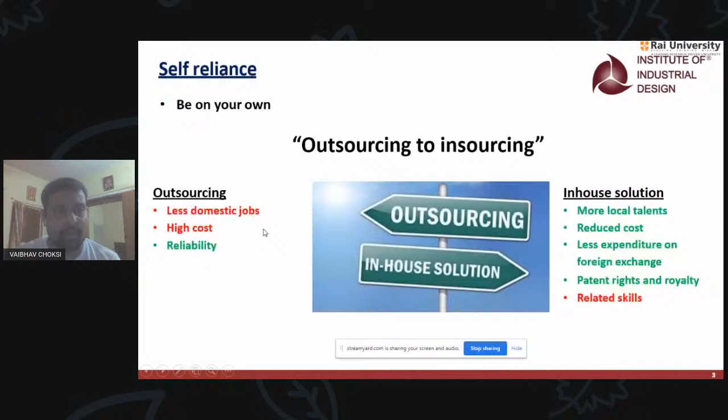Second thing we are seeing is that China is having almost 1 crore new patents registered, 1 crore plus. That means they are much more better than us in terms of new invention and innovation. Second rank is of the US, having more than 90 lakh plus patents registered in different fields. So this is how they are quite more self-reliant. If the innovation and invention cycle is promoted, we can become self-reliant in our own production and own things.

Second thing we have learned is to conserve. As engineering people, first thing we should learn as Indian engineers is that whatever is waste, we should be able to turn it into the best. Are you getting my point?

So whatever things are available, as we are learning in our college projects, we are assembling things which are quite cheaper compared to other things to make our projects. This is called jugaad technology, meaning whatever resources are available, we connect and assemble them to make good projects. So we are reducing waste on one side and making something new from those things. The benefit is we have to import fewer things into our country, we will have a clean environment, and we can save money.

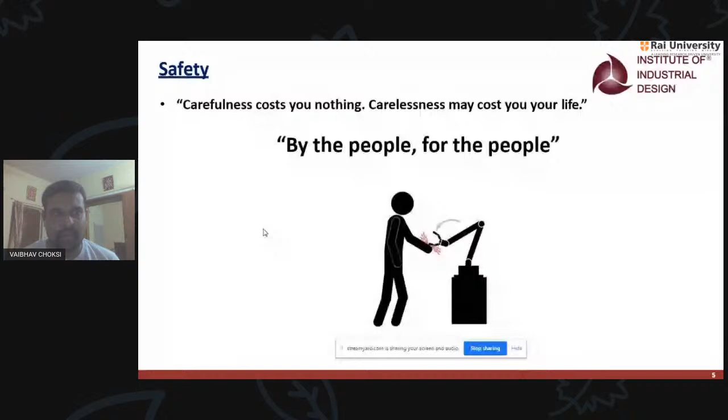Second thing is safety, which is one of the most important things nowadays. As you know, health and hygiene, considering social distancing and all the parameters the government has given as guidelines, means we have to learn living with corona itself for the next 1.5 or 2 years. So safety is of prime importance for us, considering the whole situation and what we have to learn in the coming time.

If we are saying we have to become self-reliant, we have to become vocal for local, or local to global, all the concepts our honorable prime minister is providing to us. But on the contrary, we are not planning or focused on collaboration, we are focusing on competition. Still in India, the culture of collaboration is not as strong compared to the rest of the developed countries.

So now the era coming in the future will be of collaboration, not competition. For example, if some American company is providing good service in some IT sector, we are not supposed to compete with them. Facebook has developed such a good app for social networking. Twitter has developed such good apps for short messages and short content display. So what we are supposed to do is not compete with them.

We would need their 13 years of experience, and to bring that forward on our own would take us 14 or 15 more years of hard work. It's better that we collaborate with them and move ahead, rendering the best of the service, adding Indian service along with that foreign service provider, so we can move forward.

Same as what the Jio did, signing the MOU with Facebook. Recently, Mukesh Ambani, our honorable businessman of India, signed an MOU with a business tycoon from the Gulf countries, and that collaboration is moving forward.

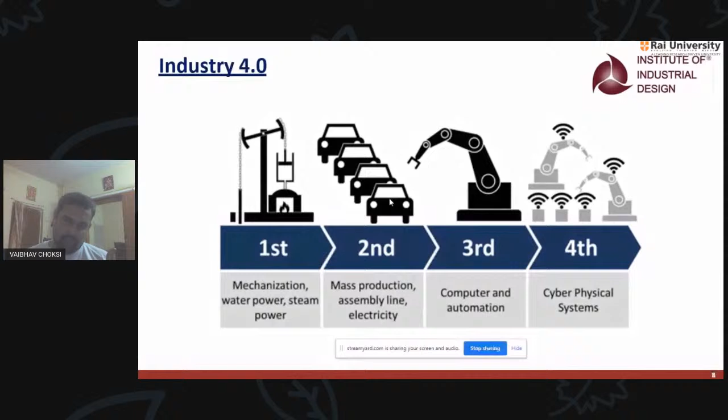Whatever things you are seeing in your daily life, for example, you are controlling your electric appliances from your mobile. That means you can turn on and off your AC, your fan, your washing machine, your refrigerator, every electrical appliance present in your home with the help of a small IoT application in your mobile.

You can control your water pump moving on the farm in the agriculture industry, the water pump on your farm, even if it is far, kilometers away from that location, that is, X number of kilometers away from your home or your location.

You can control the on and off of your water pump from your mobile itself, even at midnight. There is no need to go to the farm at 3 a.m. or in the midnight just for switching off the pump, for cultivation of the crop and all that.

The third thing you've seen is drone technology being used. You are controlling the whole drone for security purposes, for spreading pesticides in the agriculture fields, all with the help of your mobile. So this is the cyber physical system.

I will show you in the coming time that RPA, robotic process automation, also uses IoT and these things. So in the coming days, IoT, cloud computing, artificial intelligence, all these things will be the regular habit of people, especially mechanical engineers.

If you are planning to have a good career, then you should be familiar with these terms and you should have good skill in these forms.

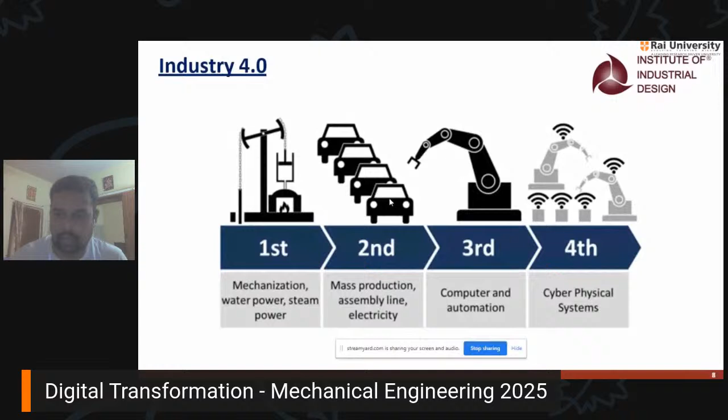Now the thing I want to show you is product design and development. I'm going to give you 5 to 10 good fields in mechanical engineering that will be the trend of the future, and you should learn these particular skills in the coming days if you want to have a good career in this field.

This concept you've heard is not new. What I'm discussing is not a new term - product design and development is a very old term. But now in this digital era, this design and development process is going to become digital in the coming days.

First concept is product sketching, second is prototyping, product styling, and reverse engineering. These four are titles you have heard over the last 3 to 4 years, so much that you might have attended a lot of seminars on these things.

Today what I'm going to show you - this is all about sketching. What is product sketching? I would like to stop sharing my screen, especially from this point of view.

Yeah, and now... One second, now I'm coming back. Yeah. Okay. Yeah, so now it is okay. Now I think you people can see my screen clearly, right?

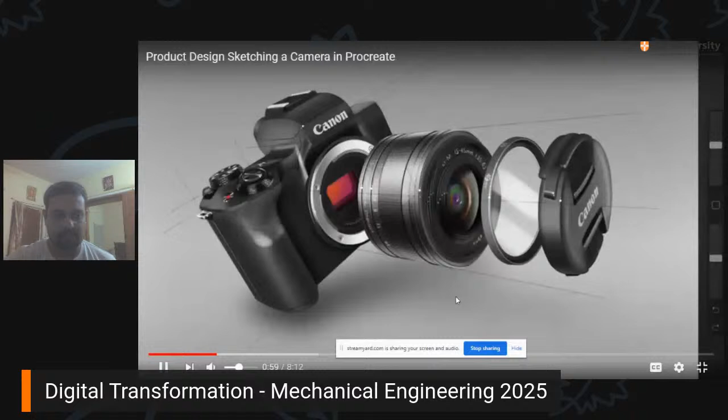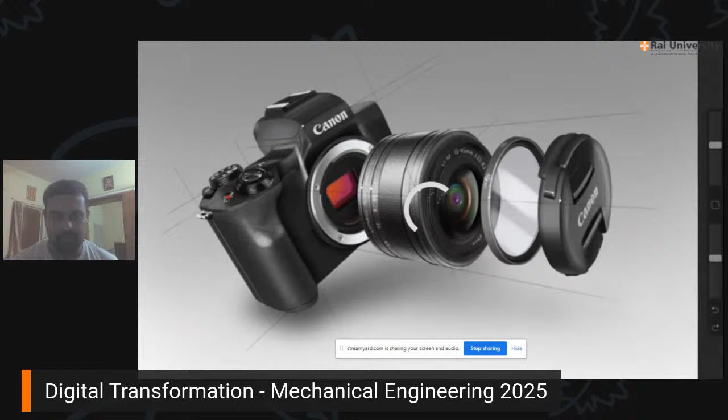The first thing I want to point out is that because this was a commission piece, it's always really important to work smarter, not harder, when you're doing a commission piece. So I did this photo shoot and actually set up this scene so I could use it as reference material for the post itself. Now if some of you think it's terrible that I'm using an underlay or tracing over something, that's the whole point of working smart, working efficiently, and getting everything done as fast as you can.

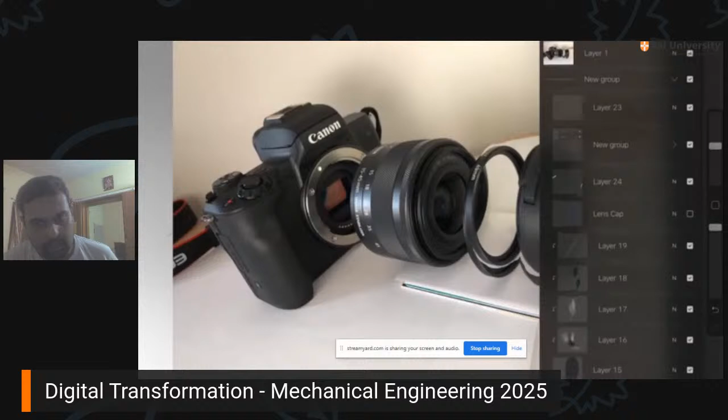I was commissioned to test out the quick shape feature, and that's exactly what I did. I wasn't commissioned to sketch something from scratch or come up with an image without any reference material. In the real world, outside of university and outside of learning about these things, reference material is used way more than you might think. So with that out of the way, I can turn this reference material off and go back to the sketch. I think what we're going to do now is come into the time-lapse replay that Procreate has installed.

Already I've gone in and sketched the outlines using the quick line and quick shape feature, just snapped the ellipses to where they needed to be. I've got this blue outline already.

This first part of the sketch is really quick because as soon as you put down some color, you can start to add in highlights and shadows using darker and lighter values. You can see here I've used a medium gray, and the reason is because that gives me space in the color spectrum to then add some shadows in with darker colors as well.

So you can see me going in here adding some darker colors. I keep bringing in the reference material at this very early stage to make sure I'm getting the lighting correct. And at this point, now that I've got the outline sketched, it's all about painting by numbers.

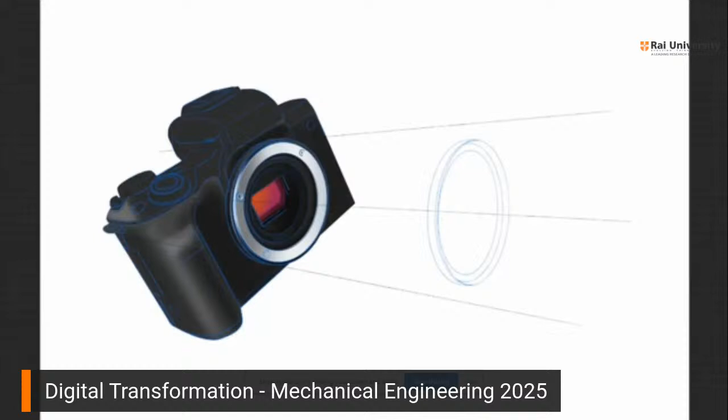So I can just go through. Apologies for the siren, living in London, it's really loud.

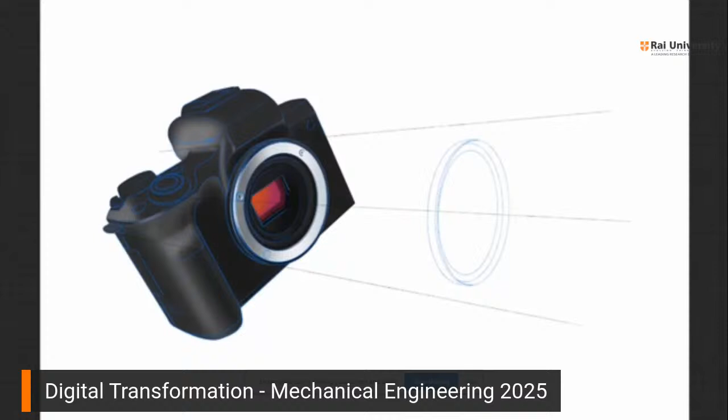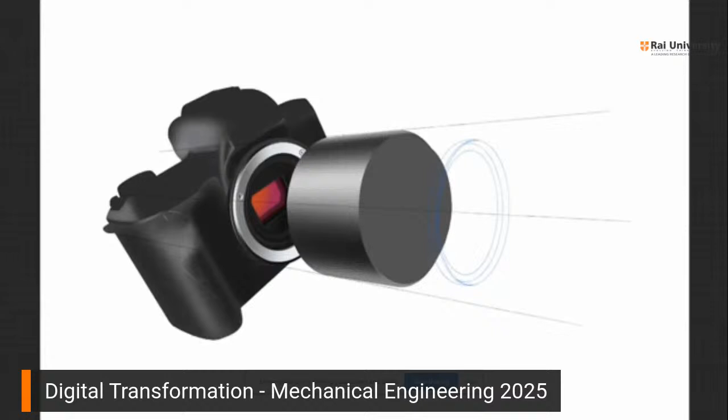As soon as I've got the base color, I can start adding in highlights and shadows. You can see I've done my leather finish, which I really enjoy using, which is just scribbling absolutely everywhere. If you do it enough and then pull back the opacity, you can really start to get a leather texture in there as well.

What I want to highlight here as well in the lens is how simple it is. If I bring it back up, it's so simple to shade in a lens with just four different aspects of it. At the very top, I've got a very faint amount of highlight, then some of the base color, followed by the main highlight which is the biggest white area, followed by the main shadow, and then some bounce back light at the bottom.

If you imagine this as a gradient, it's actually quite a simple gradient, but it gives such depth to the piece, and really makes it look cylindrical. With those bounce back features, it makes it look a little bit shiny as well, like a satin finish, and like it's in a studio, which is really cool as well.

I'm just going to let the animation play through a little bit now, and we'll see what I was up to. So I've started adding in the buttons now, and again, everything's already in, and I can start to add in the highlights and shadows based on the base color I already had on there.

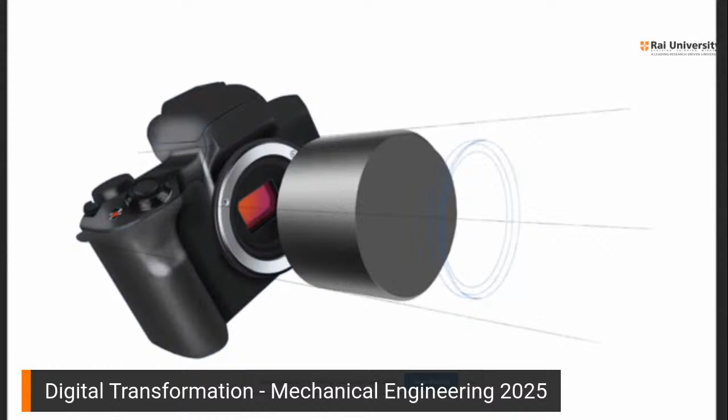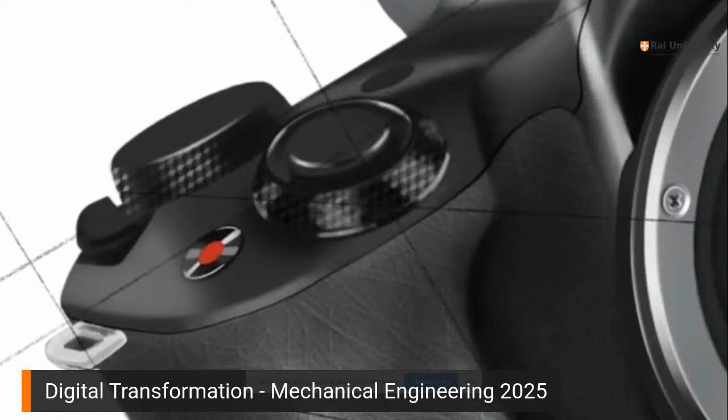This feature was really cool. I really liked having this texture from Procreate that I could use for this knurling feature on the buttons. It's a really nice texture in real life, and I really wanted to capture that in the sketch as well.

And you can see now, I think I might have just sketched these in, the lens cap and the ND filter that I've got installed on it as well.

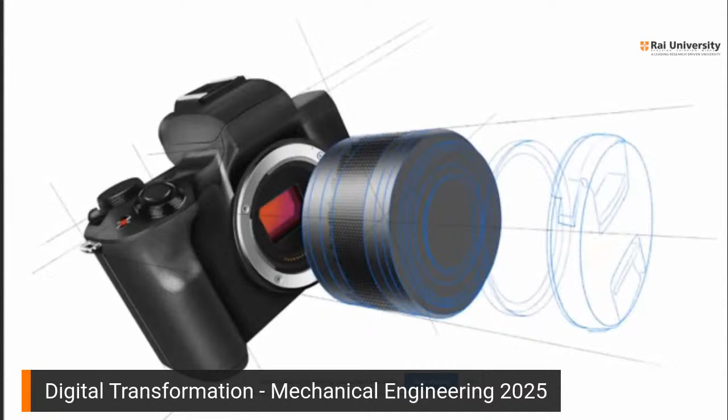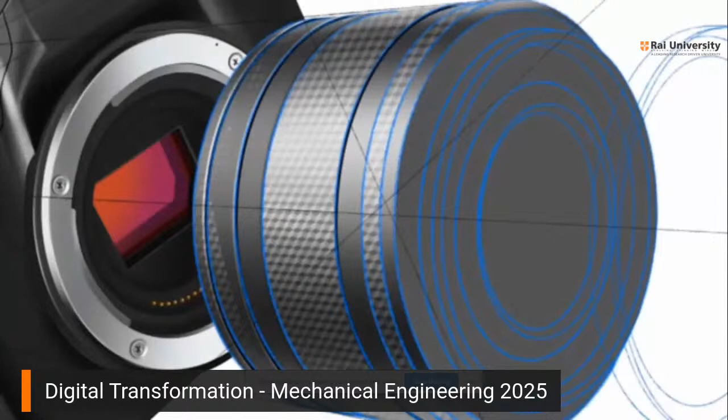Then again, it's just adding in those extra details, bringing back this knurling feature as well, and you can see me really roughly - this is before I was even figuring out about the clipping mask and layer mask features, so I was just sketching a huge area and then erasing it back.

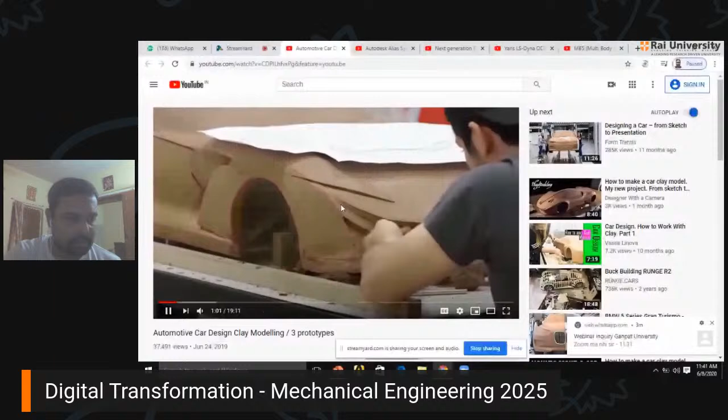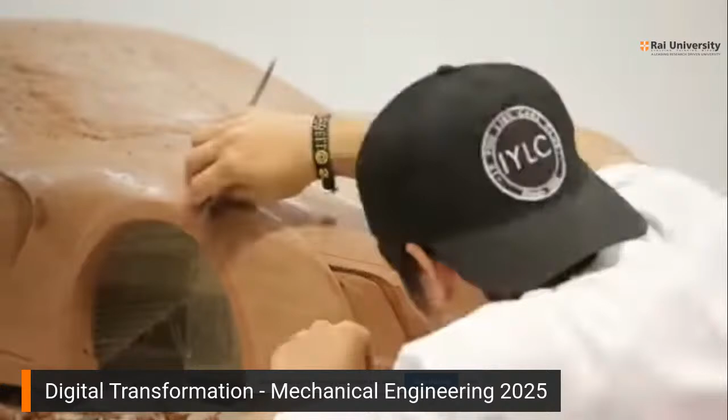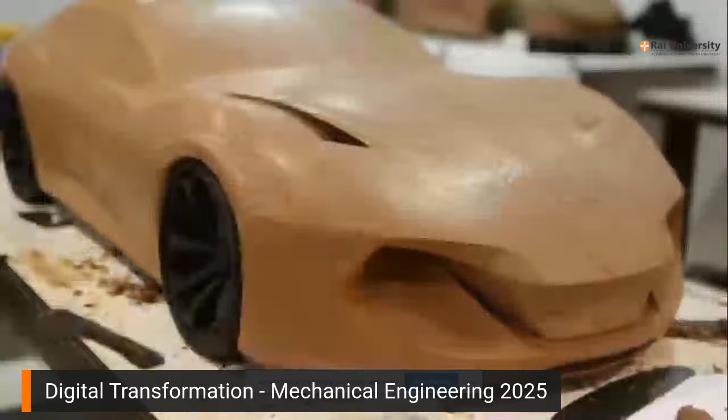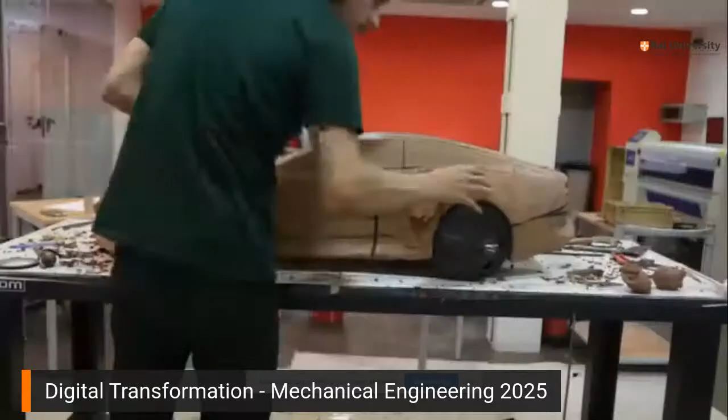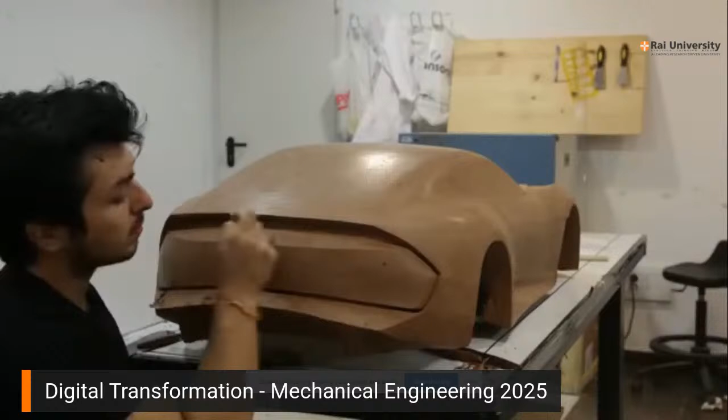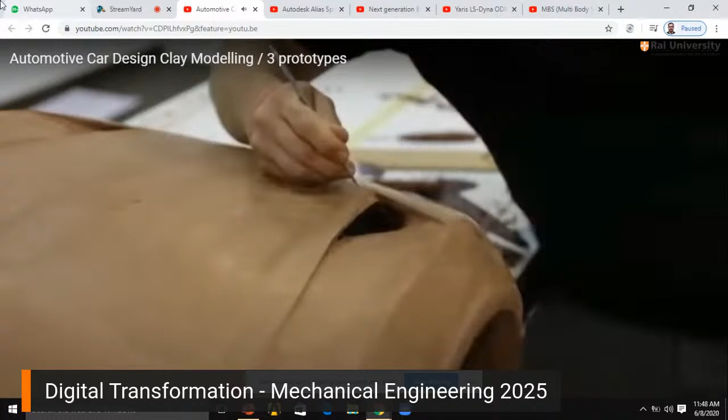So this was all about the clay modeling we were discussing. If you are a mechanical engineer and have not been exposed to this clay modeling technique, note that in future this will be part of your course. In the next one or two years, this will be a mandatory course for mechanical engineering students.

In future, every company, whether manufacturing a nail or a truck, will start using this clay modeling technique for prototype development and related work. After developing this clay prototype, it is very easy to manipulate that model with the help of reverse engineering software, and they make the actual model with actual 1:1 scale and actual dimensions.

Already the developed countries, those focusing heavily on R&D, are using this clay modeling technique. It is a very efficient and effective technique at the design stage to study different aspects. So what I want to convey is this is a coming trend.

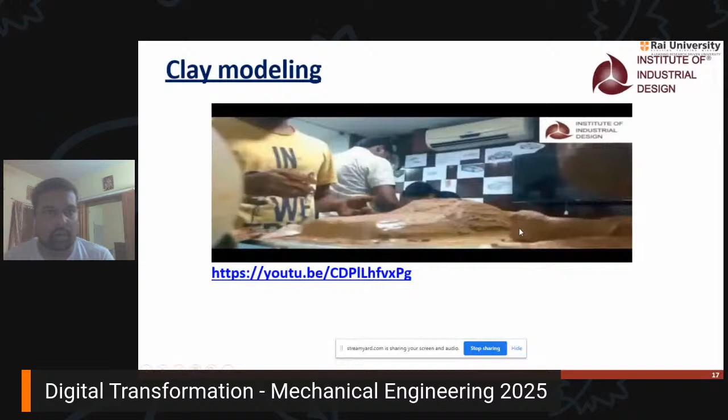So we would like to focus on tools for clay modeling. You can use industrial clay, armature material, carving tools, concept sketches, and all these things. What we already saw in the video was very informative.

With the help of clay, you can design your existing model. You can have the clay model, and after that, with the help of that clay model, you can scan it and manipulate it as per your requirement.

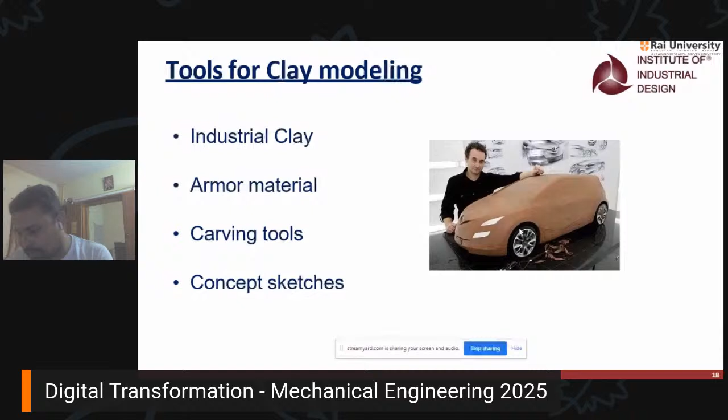Second thing related to this concept is product styling. Styling is also one of the most important things for you. See, previously, 15 or 20 years ago, you were not able to see the car shapes which exist right now.

You were also not able to see the car shapes which exist now, and every day you see some new company that...

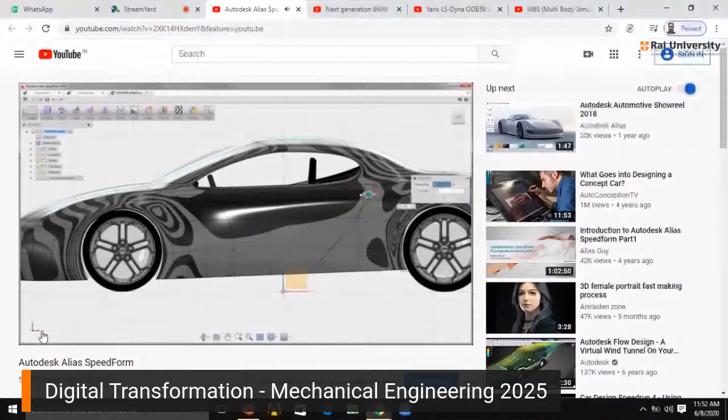The shape is your design and under your control. Experiment with the shape until it's yours. Add details to add character to your model with built-in tools. We can then add the details of the airflow design.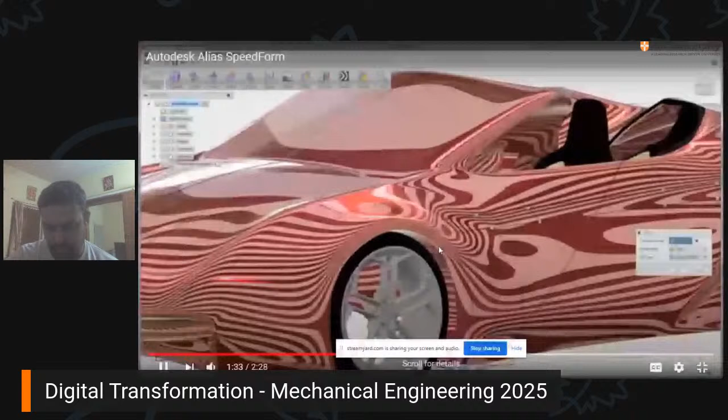But we haven't forgotten that the end result is the handoff to Alias for creation of the production surfaces. One way to show you this is the ability to use the theoretical curve to control the curvature, as we can see here. Trimming and detailing your model helps to clarify different parts of your design. Using easy-to-create cutting surfaces, we can detail out our model easily. Use in-core built-in ray tracing to look at your surfaces in realistic lighting.

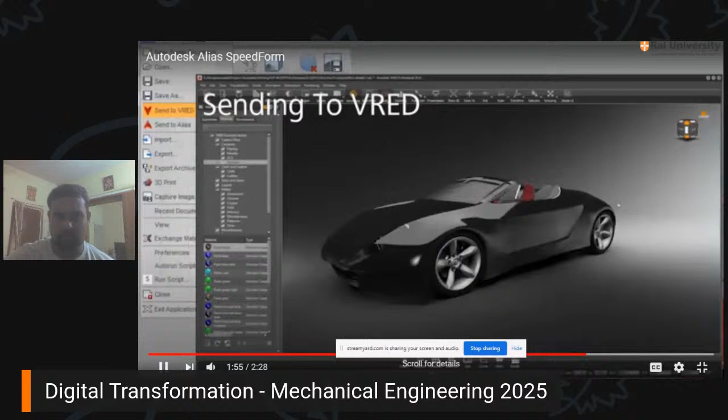Send your model to VRED, giving you the best-in-class visualization even during the conceptual design process. And as part of the Alias family, use Send to Alias to begin the detailed design or to create an early clay model of your design. Fun, fast, concept modeling built for creatives everywhere. Now that's design.

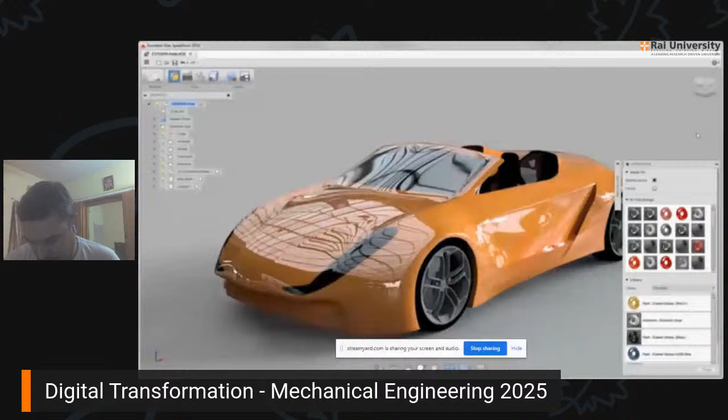So this was all about what we are learning, which is car styling within the software known as Autodesk Alias. You've seen the whole video of how essential and useful that car styling part is.

After modeling, you can use Autodesk Alias by first importing data. You have to go with reverse engineering software like CATIA and many other software available. After that, you can import that particular model into product styling software like Autodesk Alias and get good shapes.

Who should learn this? Engineering students of any discipline, working professionals in any domain, job seeking professionals, creative thinking people from arts and science background can learn. Product designers, industrial designers, creative R&D people.

What we are training is styling fundamentals. We are training computer design styling using Alias, 3D rendering of the model, surface analysis, and all these things. We do this with different companies and train them using the same methods.

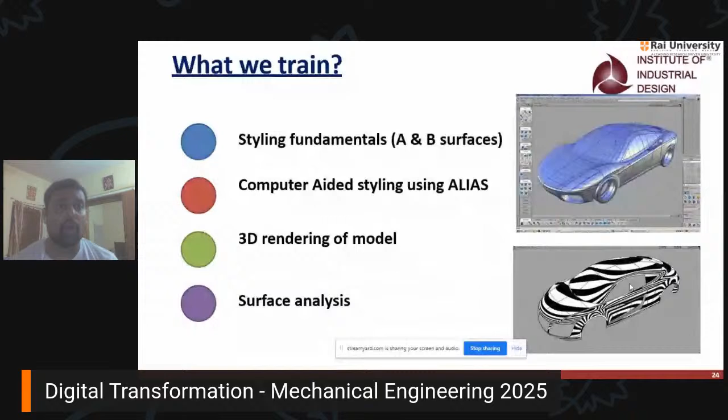What skill will you gain after completion of the 40 hour product styling technique duration? Creating class A surfaces using surface analysis, corrections, and 3D models. We have a 40 hour online course for these things as well, so you can get an idea about it.

Apart from that, we also have a technique known as reverse engineering. It's a fairly familiar thing, but after modeling that particular clay model of the car in your workshop, you have a camera available. You can see two cameras in the photograph, and with that camera you scan the whole car model. After scanning, that particular scan point data is imported into 3D modeling software, from which you can manipulate what I've shown you.

After seeing all these things, you can have these 3D scanners. This camera scanner you're seeing is worth 50 lakh. It starts from 15 to 20 lakh, and its range goes up to 1 crore or 50 lakh. With this camera, you scan the whole prototype made of the clay model, and after that you import it into software like CATIA and use it for 3D printing of actual prototypes. It's a superb technique and facility, this reverse engineering.

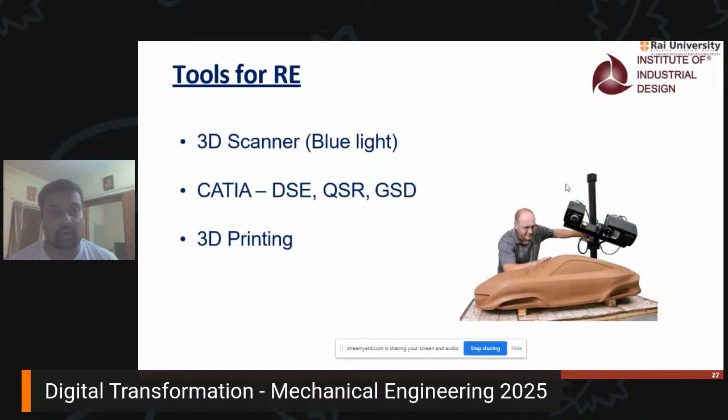What skills can you learn? Creating CAD geometries of existing products, improvising the design, importing the cloud data, converting the cloud data to a solid and surface, and refining that particular model. These are the skills you need to learn for executing this technique as a mechanical engineer.

Now, new things we are having are courses for new design and development. We also have a field known as ergonomics, safety, electrical vehicles, and power electronics. These four are also new trending things. As you know, ergonomics is about how comfortable you are feeling while handling that particular product.

Say, for example, you are using the i10 car and you travel for 10 hours or 750 kilometers, and you will feel fatigue. But the same distance you travel in a Toyota, BMW, or Mercedes, you will not feel as much fatigue as you would in a cheap car like the Hyundai.

So why is it that you don't feel fatigue when traveling in a BMW, Mercedes, Toyota, Fortuner, but you do feel fatigue in a Hyundai i10, i20 for long distances? It's because the advanced car is set up with a new ergonomic design. This is basically what it deals with.

Now, tools for ergonomics - what you want is CATIA ergonomics. Are you getting my point? It is for CATIA ergonomics and all that.

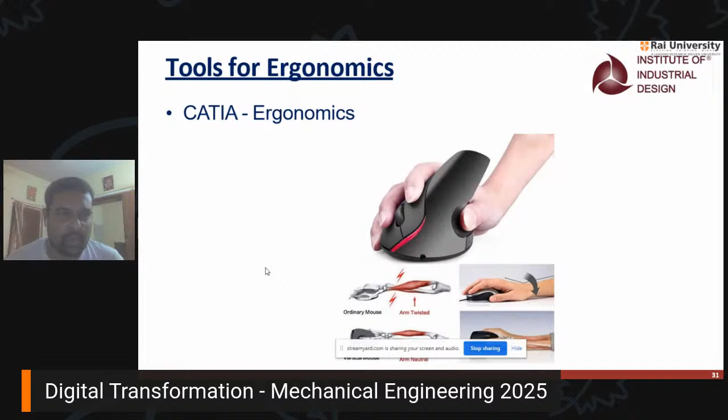I'm not talking too much about safety - it's almost a topic you can research, and you can find a lot more about it on the internet. Nowadays, another technology that is too much in trend is electrical vehicle technology.

I already mentioned in the previous webinar with Rai University on the 4th of June that in the nearby area of Ahmedabad, within 40 kilometers, electrical vehicle technology is going to make the Ahmedabad district a hub of electrical vehicle technology in the future, because Tata Nano's plant is also going to be modified to produce electrical vehicles in the coming 2 years. The Halol region is almost 70 to 80 kilometers away from Ahmedabad district.

That means MG Hector - MG Hector company is basically from China. It has taken over the company from General Motor, the Indian-based company. What they are starting is producing electrical vehicles in the General Motor facilities at Halol. That's how it's going to be in the future.

One second, I'm having some foreign call, I have to answer. Hello.

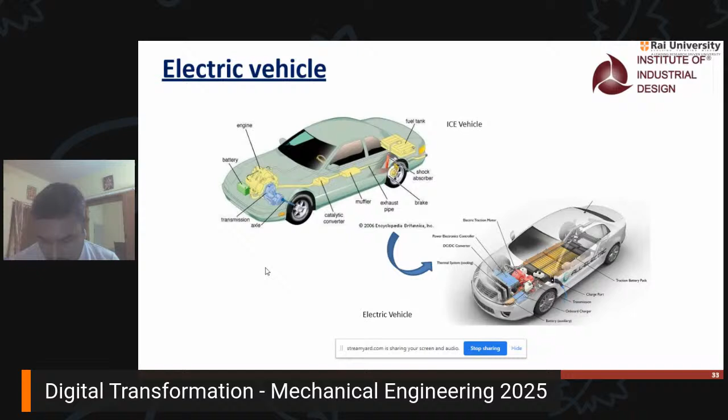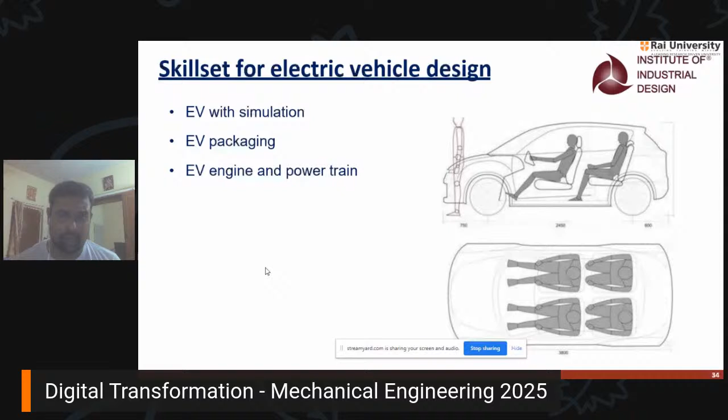That's electrical vehicle technology. In future this EV technology is also going to create a great boom in the field, and mechanical engineers who have the skill set to design EV with simulation, EV packaging, EV engine and powertrains - all these are part of mechanical work. So you should get trained and skilled to be compatible with this new technology and have hands-on practice on the same. In future, after 1 or 2 years, when Gujarat becomes a hub of EV, you can have your career as an entrepreneur, or get employed in a good company manufacturing EVs. So this is also a very good scope for mechanical people.

See, nowadays mechanical engineering is not wholly known for mechanical only. Now it has become mechatronics. For example, you switch on to RPA, that is robotic process automation. You switch on to AI. That means the mechanical engineer should also have knowledge of IT, that is information technology. Mechanical engineers should also have knowledge of C, that is programming technology, for programming the machine - machine learning, deep learning. These are the new concepts which are going to come.

So along with this, power electronics, IT and IoT are also becoming the core interest for mechanical engineers to have good employment and better career opportunities in the coming years.

See, these are also going to become a good future - that is BIW, simulation, quality and manufacturing. You heard this term for the first time, that is BIW. Now I would like to explore you with this BIW simulation, quality and manufacturing. Apart from this, BIW is very interesting. See, BIW is body in white.

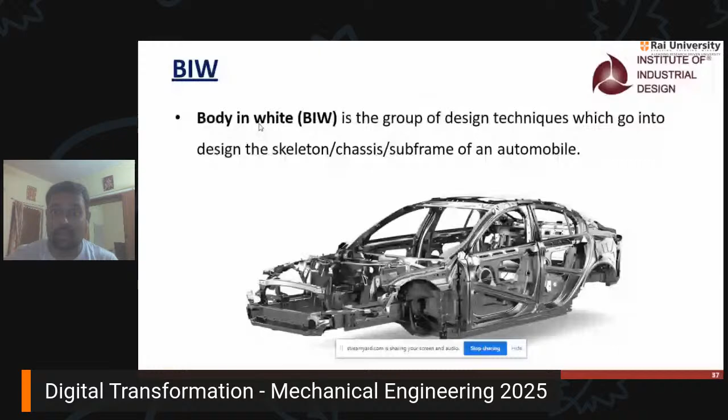What I've shown to you - whether it is an EV electrical vehicle or whether it is a petrol or diesel vehicle - when you are having a car, when you are having a car company in your region, in your Indian market, and if you want to make your own car, then the first thing is that you should know the BIW concept, this body in white concept. See, BIW is a group of design techniques which go into the design of the skeleton, the chassis, the subframe of an automobile.

See, up to this time, what our Indian car manufacturing companies were doing is dealing with this BIW design by importing it - that means outsourcing this BIW design. Indian companies like Maruti Suzuki and Tata Motors were sending out, and all the designs were done by developed countries like Germany, Japan, China, and they were providing us the BIW design. But now India has focused on making its own BIW design.

In future you will feel that this concept is very new, and you're also going to get too much good career opportunity in this field. So I would like to show you a small video of BMW 7 Series, so you will get the idea of what actually BIW is, how you can apply BIW, and what is the application of BIW in the design phase.

Okay, so now, once a minute, yeah, now it is ready.

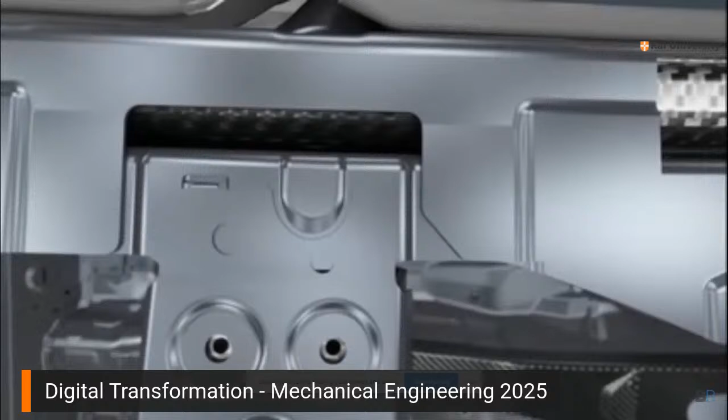Allowing the new generation to combine efficiency with sporty dynamics in a unique way, with a carbon core.

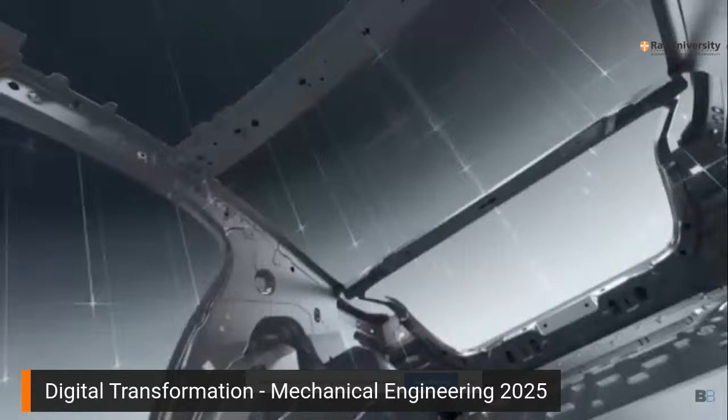A key element in the lightweight design concept developed for the new BMW 7 Series is the intelligent interplay of different materials. The smart combination of carbon fiber, steel, and aluminium reduces the weight of the body shell by 40 kilograms.

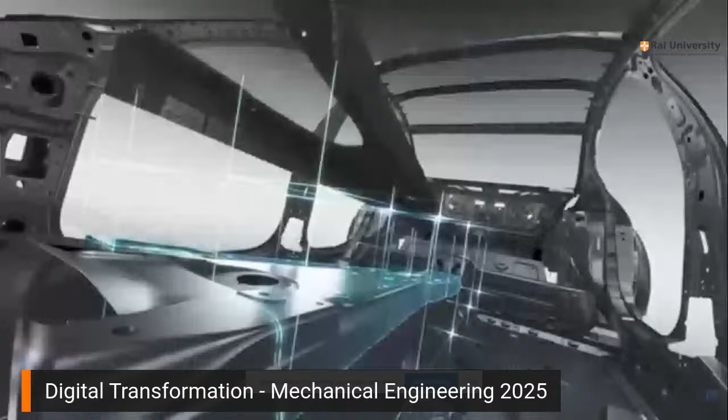The new BMW 7 Series is the first model in its segment to incorporate carbon fiber components manufactured on an industrial scale. The use of carbon fiber optimizes the body's properties and is particularly effective for components that have to withstand high directional forces.

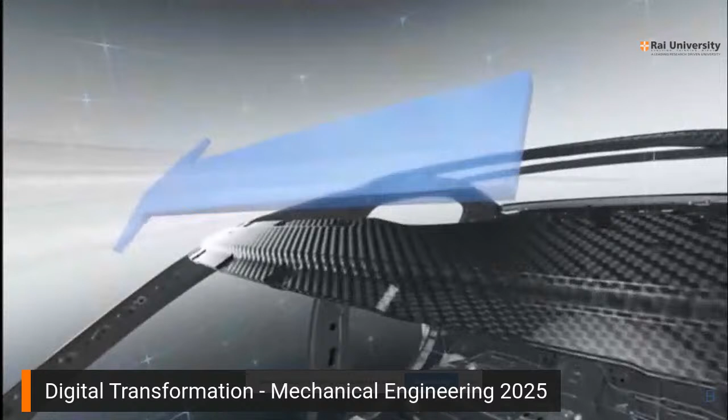Its inherent strength allows CFRP to meet extremely stringent safety requirements. Around the B-pillar, for example, in a collision, the B-pillar does not deform along the carbon fiber strengthening element. Instead, the interplay of CFRP and steel diverts the impact forces.

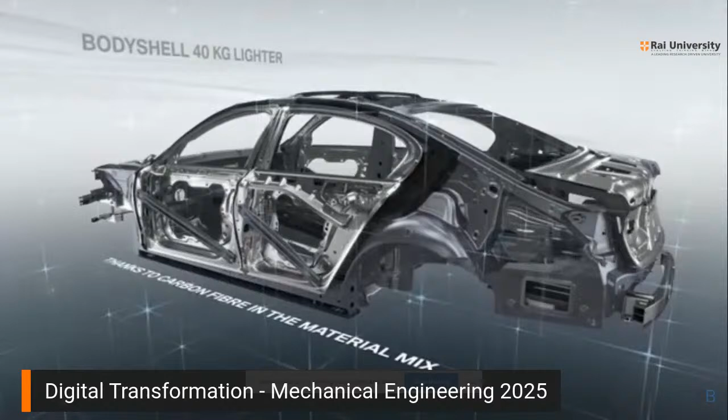But carbon fiber is just one of the materials at work. Lowering the car's weight by up to 130 kilograms required the application of lightweight design techniques across all components. Innovative lightweight design in the new BMW 7 Series enhances both comfort and driving dynamics. The key elements here are a low center of gravity, optimized axle load distribution, agile handling, and improved acoustics. Underpinning them all is the rigorous application of a whole vehicle approach.

A good example are the new design all-aluminum doors. Though the material is the same as before, they now weigh 10% less, improve the interior acoustics, and also meet the highest safety standards.

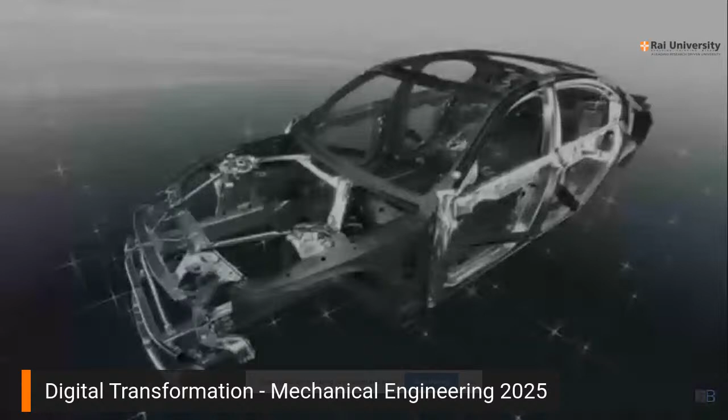The skillful use of insulation around the engine ensures quiet and pleasant onboard acoustics. Engine and transmission mounted encapsulation also reduces weight.

Across-the-board optimization of components and details leads to yet further improvements in weight and driving dynamics. A systematic reduction in the weight of unsprung masses, such as the wheels, wheel bearings, wheel carriers, brakes, and control arms by 15% in total makes for enhanced ride comfort.

Lightweight design and sustainability go hand in hand at BMW. Thanks to its efficient dynamics program, BMW already leads the way. Resources are also saved in the manufacture of the lightweight components. Carbon fiber production, for instance, uses 100% renewable energy.

So almost what I've shown to you in this session is that you've seen the whole of the process of making of the BIW, okay, that means body in white. The main objective of making the body in white, the purpose with which the BIW is designed, is to make the whole of the model lightweight.

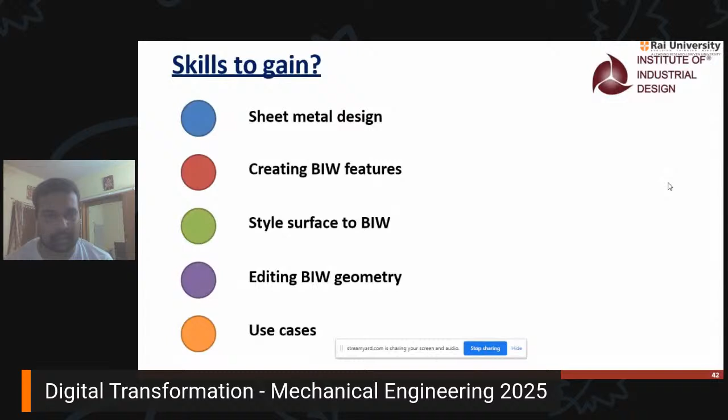After that, this is one of the most important things. As you know, previously, what was the scenario available in the market? What was the scenario in the market, that previously, almost if you want to launch any car in the country of the UK, you need to break.

You need to break almost 36 models in the crash test. That means your company, car manufacturing company, say it may be a Rolls Royce or it may be a BMW or it may be a Tata Motors, if they want to launch their vehicle in the UK, they have to break 36 models of the car. That means the live model, the practical model after the full-fledged manufacturing in the test rig of the MIRA, in the crash test only.

That means the UK people and UK government are very concerned about the safety of the driver, safety of the passenger, those who are traveling in the car, and after that only they will give permission to launch that particular vehicle in the car market. So what I want to suggest to you is this was a very costly procedure and very time consuming procedure in the previous days, that means before 10 years or before 15 years.

Nowadays we have software available for crash testing. In that software you can test what will happen if an accident occurs from the front - what will be the safety of the driver and passengers sitting on the front seat. If the accident happens from the rear side, or a hit and run case happens, what will be the position of the person hit by your car, what are the safety features for drivers and passengers, what is the strength of the seat in case of accidents - everything is checked based on these things.

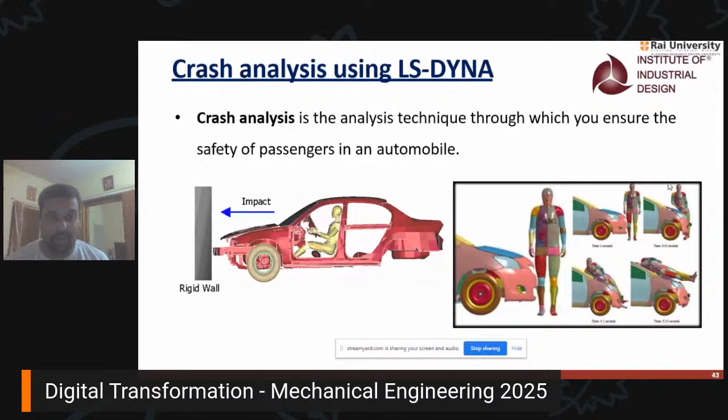I would like to show you one of the small videos of the crash test and analysis, how it is working, and what is about the future of the crash test with LS Dyna. Okay, so now one second.

Now you can see how it is practically working.

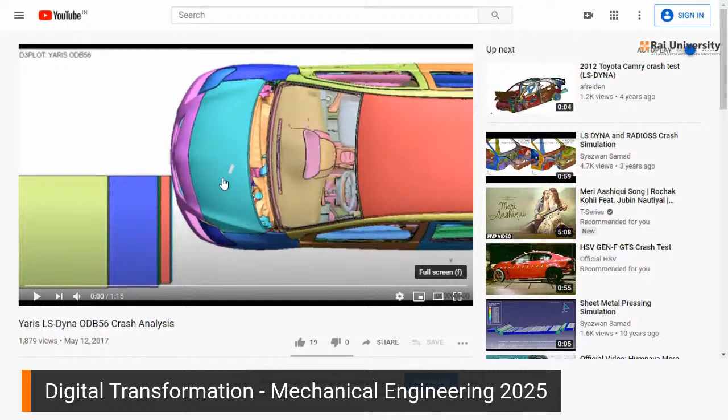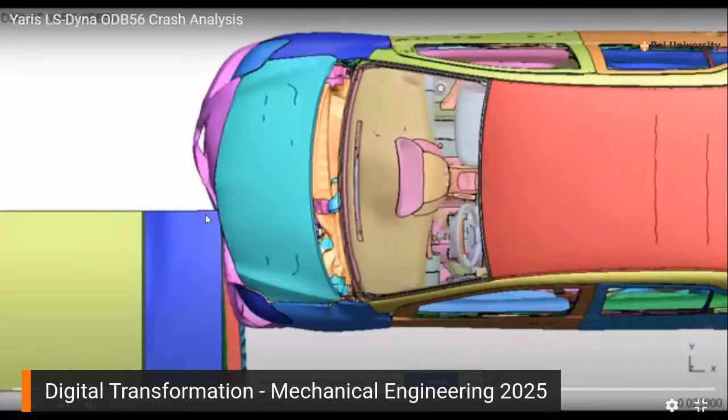Surfing problem is there, now it is okay. Agree? Yes, shown to you - your car is getting into an accident. Here now you can see your car is getting into an accident with some object in between. The left side of the car is getting hit, and what will be the position of your car - all of these things will be predicted in the LS Dyna software.

Now you can see the car getting into an accident from the front side, and the airbag opens, and the driver's head impacts the airbag. You can see in detail by zooming the screen that upon getting into the accident, the airbag opens, and what will be the safety of the driver. Now you can see the whole object along with the safety of the airbags and all the things.

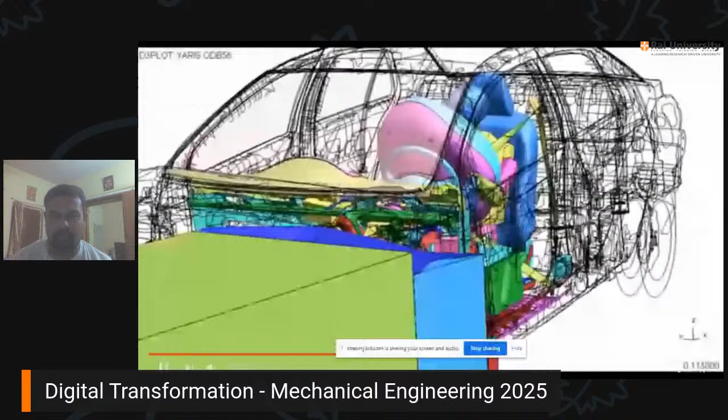See how nicely it has shown what the safety features are and how they will respond at the time of an accident. You can predict this initially at the time of the design itself - what will be the condition of the seat belt, what will be the condition of the airbag, how the driver seat will respond at the time of the accident.

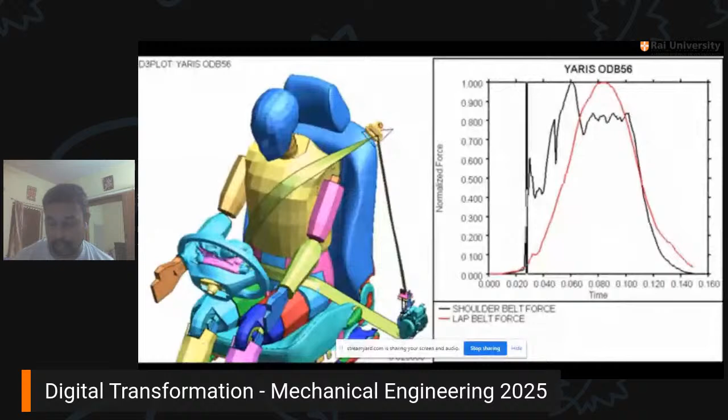See now how nicely it is showing the airbag collapsing at the time of the accident, and your driver will save his chest, his torso, his head - all the things will be safe - and the driver seat will go back and all those things.

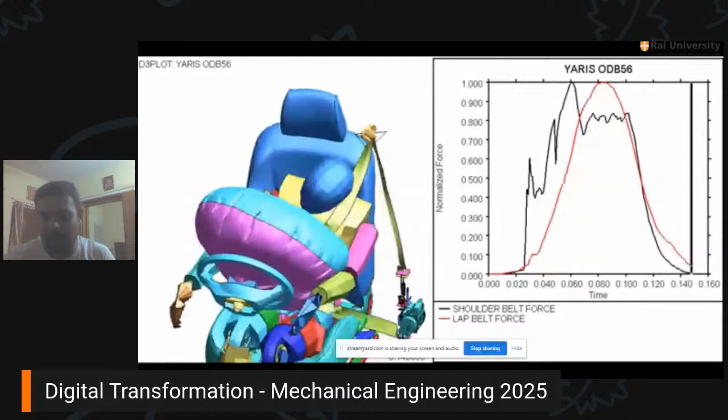So what I want to show you by this video is that it is a very good software, a super software, and you should learn this software.

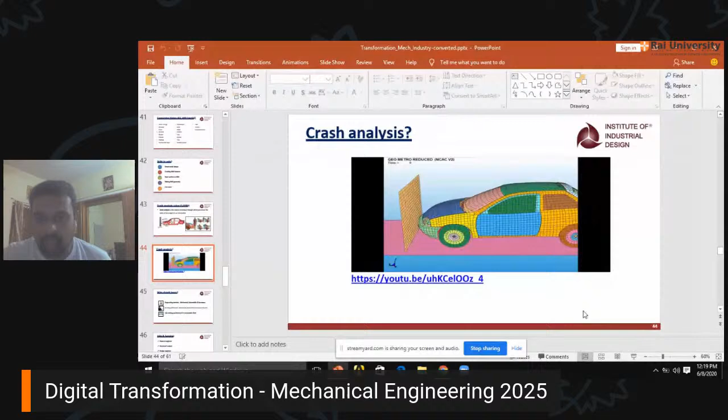Because as an engineer, if you are willing to make a career in the field of automobiles, as I was saying, Gujarat region is going to become an automobile hub with a cost of 5,700 crore rupees in the next 2 to 3 years. So if facilities like this crash analysis exist, and people have the skill of crash analysis, if Rai University's mechanical department takes the initiative in this, then all students will have a good career in the field of crash analysis.

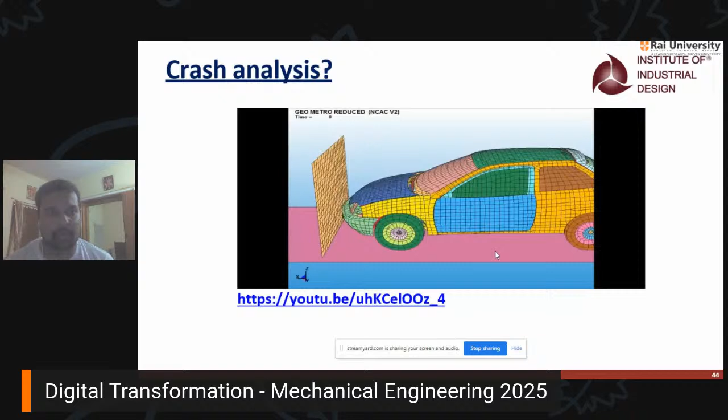Apart from that, this is also a very interesting field - CFD, that is computational fluid dynamics. What is that?

That is computational fluid dynamics. Say for example, if you are manufacturing a high speed car right now, every car you're finding on the road has an aerodynamic shape. But if you want to check the aerodynamic shape and the efficiency, the fuel efficiency and all the things, it is depending on the aerodynamic shape of the car.

The more aerodynamic your car, the more fuel efficient it is. More aerodynamic your car, it will have more stability in terms of ground clearance and all that. So computational fluid dynamics is also a software to analyze the aerodynamic shape of the body, and you can predict the fuel efficiency, air drag, air lift, everything at the initial design stage only.

So this is also a very good future, if you learn CFD and gain these skills. We are teaching this computational fluid dynamics with ANSYS Fluent. That means you can learn with us the fundamentals of CFD, ANSYS Fluent, creating the models, using the cases, creating the reports, and everything. This is also very interesting.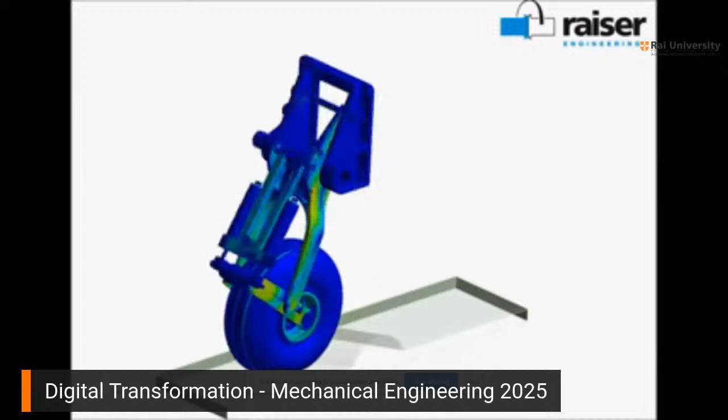I think there's some issue regarding the surfing speed and things, but you can see here the aeroplane speed. The aeroplane is landing, and you can see the whole simulation of the landing gear, along with the tire pressures and how the suspension is reacting at the time of landing, including any speed breakers or surface disruptions coming through in the simulation, as shown on my screen.

This is also a very interesting field for warfare or for your enemy, to see what will be the effect of a particular bullet, whether it will plunge into the wall or go through it. That can also be seen with multi-body dynamics. So it is also a very interesting field.

Like in manufacturing, you are using different software and digital platforms, so your workpiece or die, whatever you are forming on your VMC or CNC machine, will not become scrap if any mistake happens at the manufacturing phase. At the initial level only, you can see every parameter, check every parameter, everything that's happening. You can simulate the whole manufacturing process at the design stage itself, in your own computer, using different software available in the digital market for mechanical engineers.